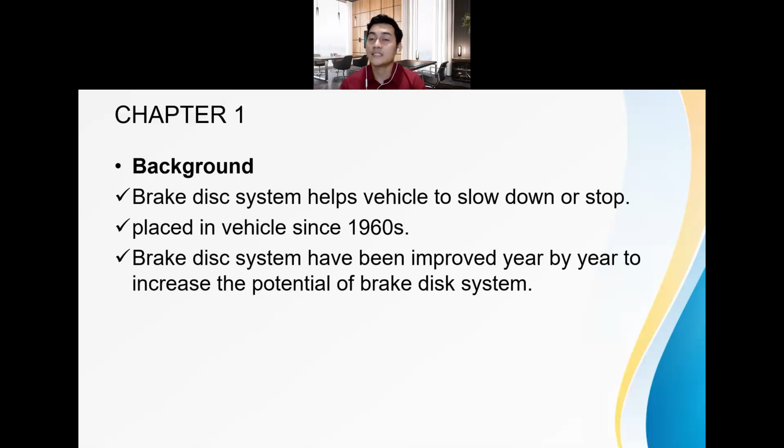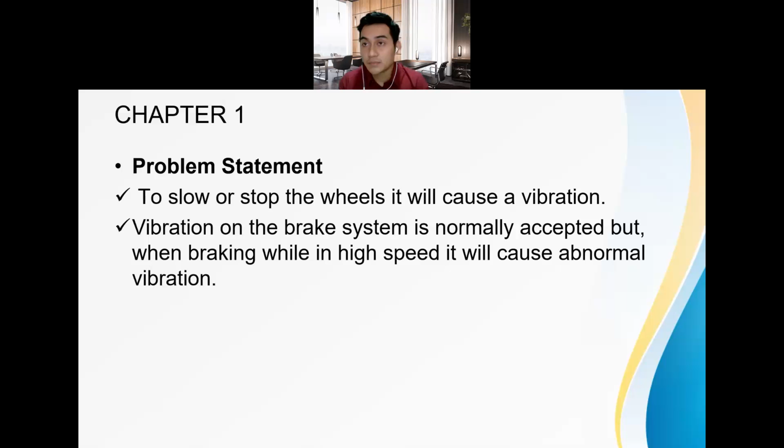Okay, the problem statement for my report is, firstly, to slow or stop the wheels, it will cause a vibration, of course, and vibration on the brake system is normally accepted. It is normal, but when braking at high speed, it will cause abnormal vibration that will cause some problems.

So the research objective for my report is to study the vibration on the motorcycle brake disc system at different speeds, and then to compare the difference of vibration on the motorcycle brake disc system at different speeds. Third, to analyze the vibration spectrum on this brake. The last objective is to collect vibration data using selected software based on the experiment.

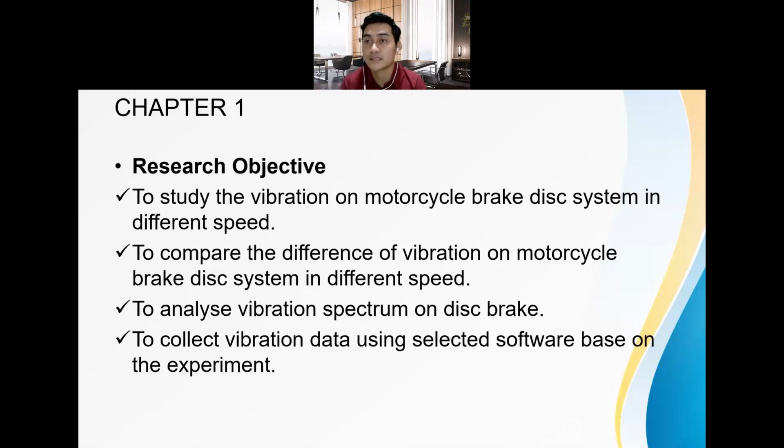The scope of this research is disc brakes for motorcycles, determination of mechanical properties and dimensions of the selected disc brake, where I will choose a selected size of disc brake to run the experiment. Performing the experiment on the brake disc system and using software for data management. And lastly, comparison of vibration analysis of the disc brake between different speeds.

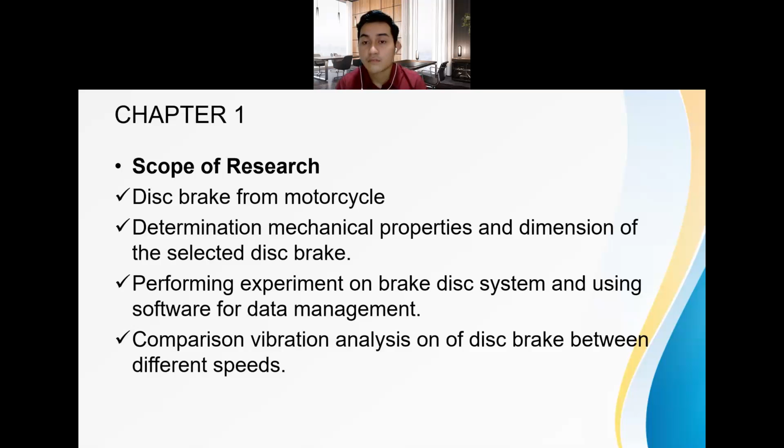Okay, so we will go to chapter 2, which includes the other theses that I found and put inside my report. So we'll go to the introduction first. The braking system allows the vehicle to come to a complete stop. Many people may consider the braking system to be the most crucial system in the operation of a vehicle. An excellent braking system allows the driver to bring a vehicle to a complete stop in the minimum duration of time.

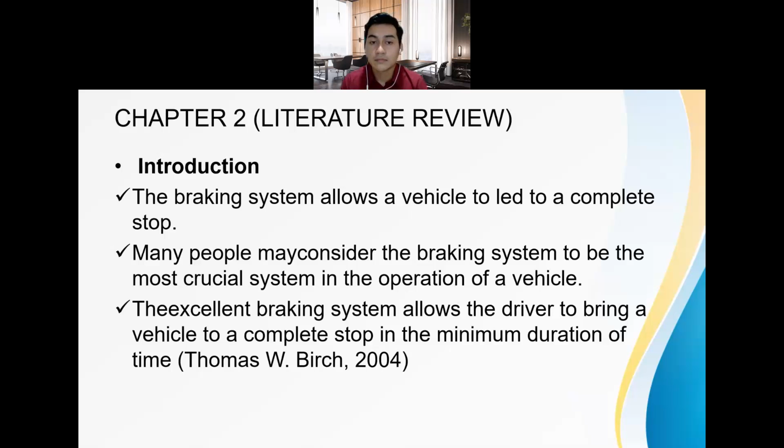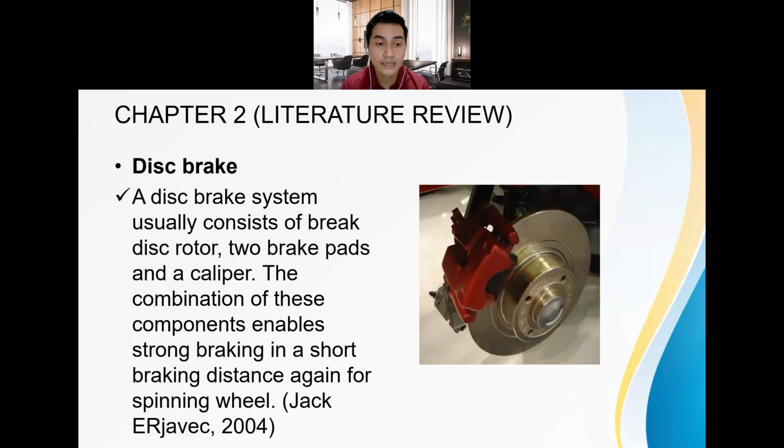Okay, we will go to the next point, which is the disc brake, the most important part of my report. A disc brake system usually consists of a brake disc rotor, two brake pads, and a caliper. So these are the items inside the braking system on the vehicle. The combination of these components enables strong braking in a short braking distance against the spinning wheel. This is from Jack Erjavec, 2004.

So, okay, we go to the faults in the brake system. There are four. There are actually more than that, but the main faults in the brake system are, first, misalignment, leaking brake fluid, which is normally found in motorcycles, then brake squeal, and lastly a stuck caliper piston.

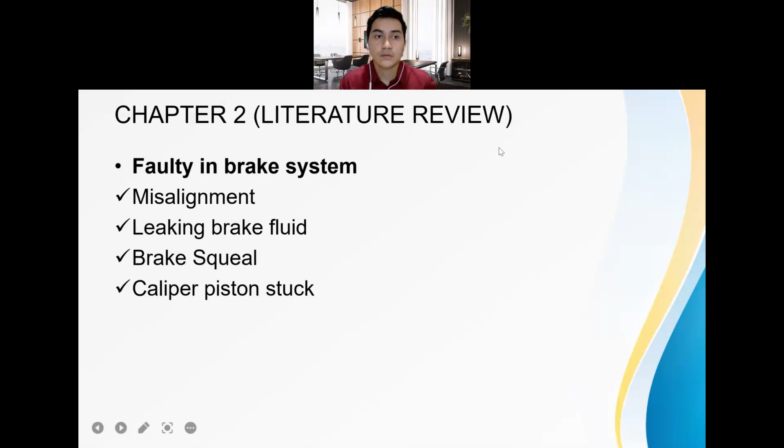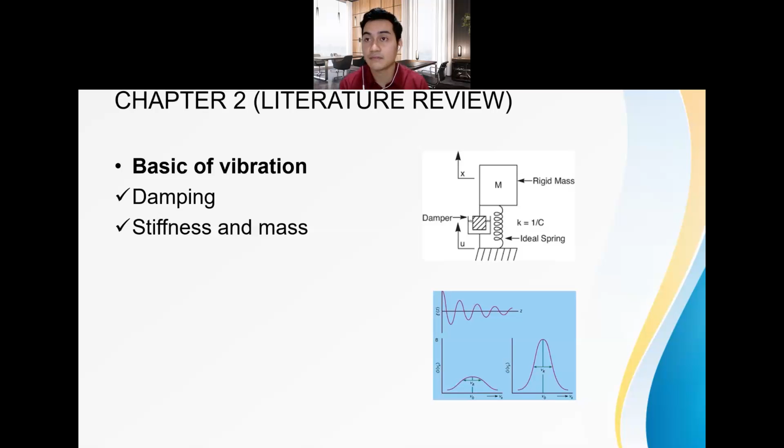So as you can see in the diagram here, we have damping, which will cause a vibration, and below the diagram of the damping, which includes the mass, we have a simple graph for vibration, an example of a vibration reading. Okay, we go to the vibration analysis.

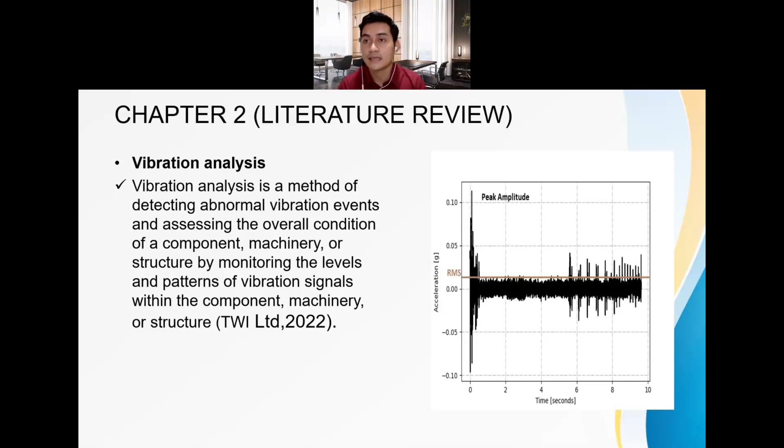So vibration analysis is a method of detecting abnormal vibration events and assessing the overall condition of a component, machinery, or structure by monitoring the levels and pattern of vibration signal within the component, machinery, and structure, which is written by TWI Ltd 2022. As you can see here, this is the vibration analysis graph, which includes the acceleration against the time in seconds. So as you can see, it has a peak amplitude. So it will say either it's normal vibration or abnormal vibration.

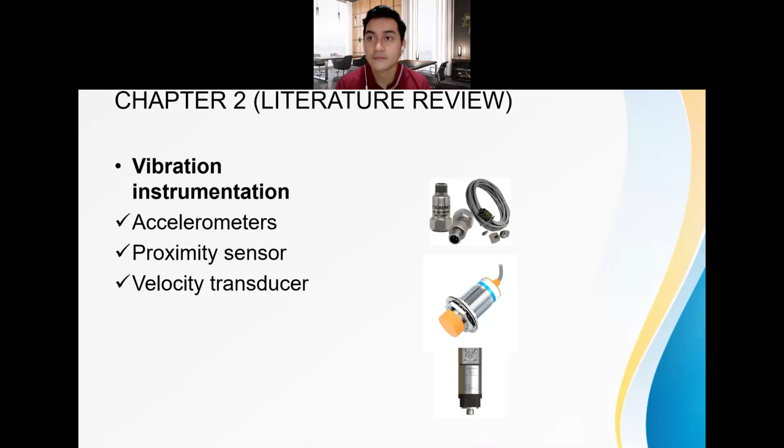Okay, we go to the vibration instruments that maybe I will use in my experiment. So firstly, accelerometer, the first picture, and then proximity sensor and velocity transducer. Okay, software that maybe I will use in my experiment is MATLAB and LabVIEW. So this is to simplify my research.

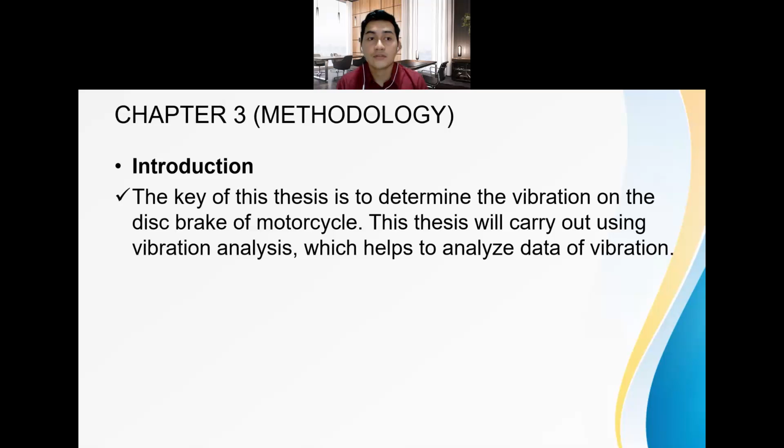Okay, for chapter 3 methodology. So the introduction, the key of this thesis is to determine the vibration on the disc brake of a motorcycle. The thesis will be carried out using vibration analysis, which helps to analyze data of vibration. Okay, so I have figured out how to start my research for this sem and next sem, which is I will run the experiment. I will get a selected disc brake, and then after I run it on the machine, I will use a transducer to collect the vibration, and using DAQ it will analyze the data, vibration data, and then processing data. Usually we use a software in the PC.

Okay, so this is my flow chart. You can observe. So I will start with research the literature review, and then measurement of the shaft diameter. I will use equipment in the lab, vibration lab in factory one. So I need to get the shaft diameter to make sure my brake disc fits it, and fabricate the disc brake, which is I need to fabricate the clamping for the disc brake onto the shaft. I need to make a clamping. And then the next step is disc brake fitting on the shaft. Is it fit? I will carry on to the next step, or if it's not fit, I will go to the fabricate process, and then experiment setup.

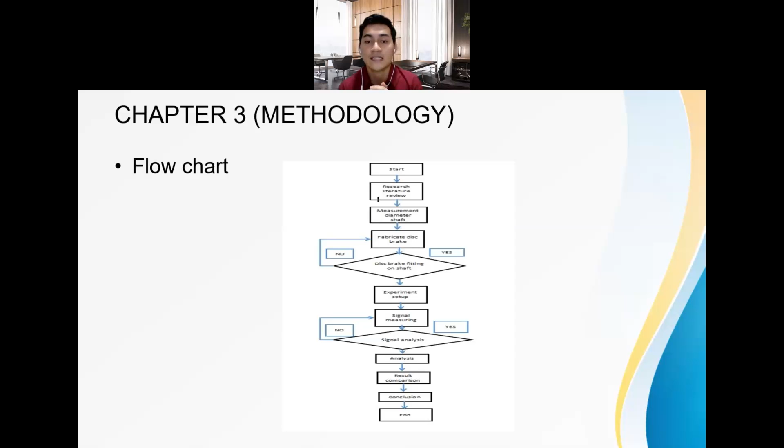The next, and then signal measuring, and if I have a problem with my signal analysis, I will go do the signal measuring again. But if I have no problem, I will go to analysis, and then result comparison, go to conclusion, and I will finish my experiment.

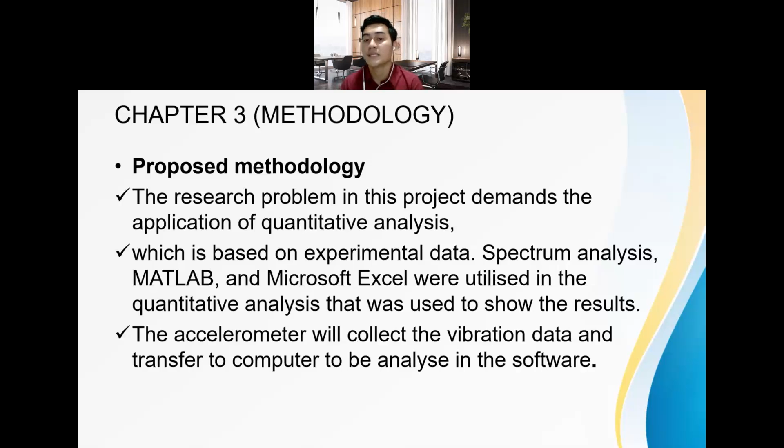Okay. In my experiment, I will choose the parameter. The parameter for the experiment is the speed of rotation (RPM), and I will choose 500 RPM, 1000 RPM, and 1500 RPM for this experiment. And after I collect all the data based on the RPM speed, I will compare between the speeds.

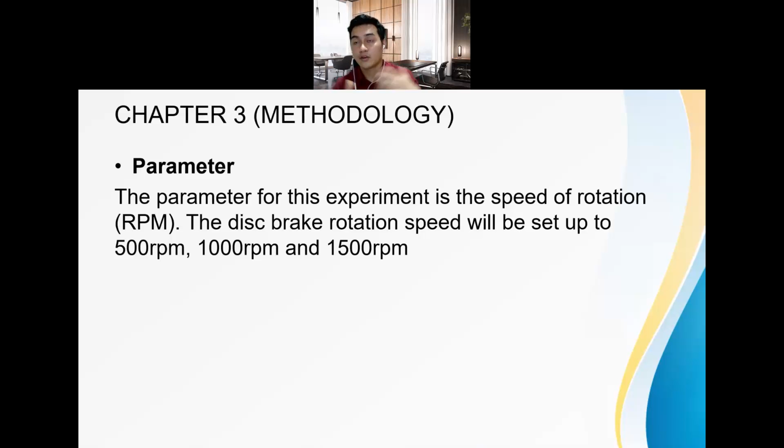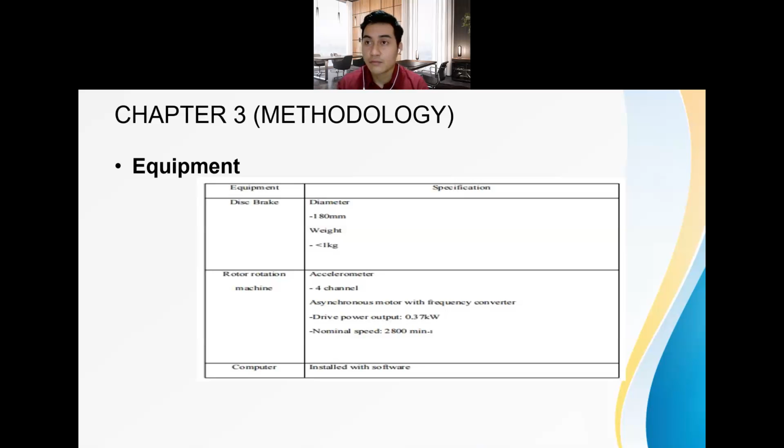Okay, the equipment I will use for this experiment: I will have disc brake, whose diameter is 180 millimeter, and the weight must be less than 1 kilo. And the rotor rotation machine, accelerometer 4 channel, asynchronous motor with frequency converter, which is drive output 0.37 kilowatt, nominal speed 2800 per minute. Okay, and then the next equipment is a computer, which will be installed with the software that I will use.